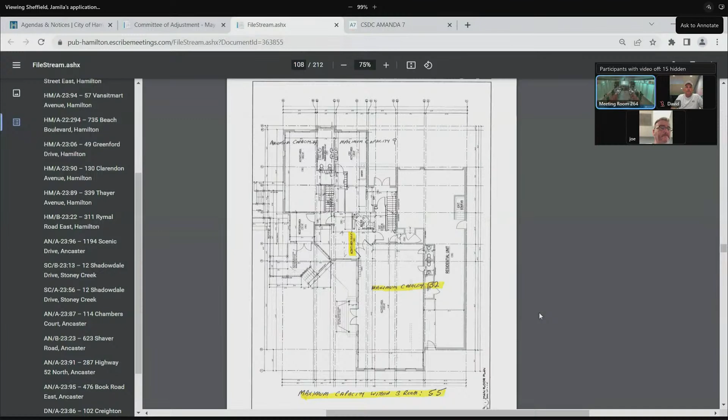So this way we're not going to be going to a 4th classroom. There's a little highlighted area you'll see, it says activity area. It could accommodate 9, but we don't need to go there. We can still leave that as an activity area, especially on days when it's raining and weather's bad.

So that addresses our first note that the city had. The second one regarding parking. On page 3, you'll see there was a ramp. To me, it was when the engineer designed it, he didn't do it right. He should have been pointing the different way, which I'll show you on the next page. And at the bottom, you'll see in the garage, we had an open space which we didn't take into account when we did the original site plan. So I figured the R12 residence, I can move that into the open space, which you'll see on the next page, page 4.

And that still stays within the guidelines that were in the zoning, how many cars you can have past the front yard and behind. So I talked to Liam, and he was okay with the garage one. And the concern with the DC-14, as you can see on the drawing where the ramp is changed, it makes it easier for cars to get in and out. There's like a 6 by 6 meter, or 6 feet by 6 feet area we got to pave, which is not going to increase the 35% maximum space that you can use for parking. So we're well within the guidelines there.

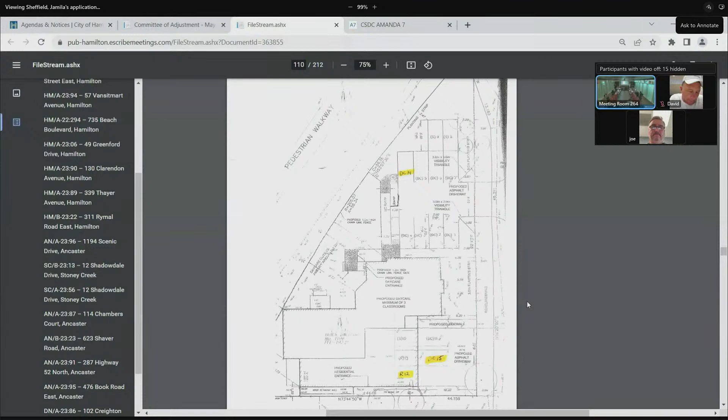And that's why I think Liam sent a letter to you after I talked to him, and I highlighted 2 sections in there. He said once we do the 2 parking spots, the total proposed parking space count is 15 parking spaces, which exceeds the minimum required amount of 6 parking spaces that we need. So I'm more than double the parking spaces to account for what we need to do with 3 classrooms.

And the third comment in the notice was regarding the barrier-free parking, and he did say, I did talk to him, that there's no requirement, so I'm not going to make any changes to that. The space will be there. I just want to keep things simple, so I'm just going to withdraw that. So yeah, that's all the comments I had to address the three issues that were brought up by the city staff. Okay, thank you.

Okay, I'll call the interested parties. So we have Palomina Filipovic first. Pamina's just here to support. We're just going to have Michelle. Sorry, so you all registered to speak, so you don't want to speak? I think they're all in support. No, it's Michelle. Okay, so then whoever wants to speak can come forward.

I'm a resident in the area. I've been there for 4 years and don't see any issues to having more kids. They do good work, they're a good center, and there's never been any increased traffic issues, never any increased parking issues. They seem to all be contained within their building and parking area, and I'm in full support of the additional children. I think it's good for the community, and with childcare being hard to find, it's not a bad thing to have more spaces available for parents.

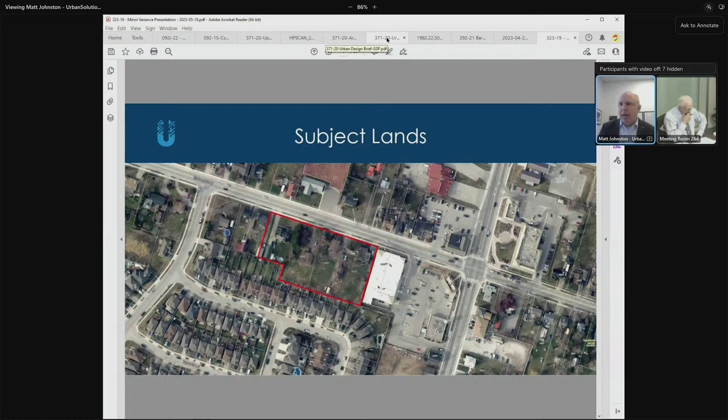This is the second time back. Some of you will recall the application was tabled so we could clarify some of the variances specific to the balconies. So here we have an aerial of the subject lands.

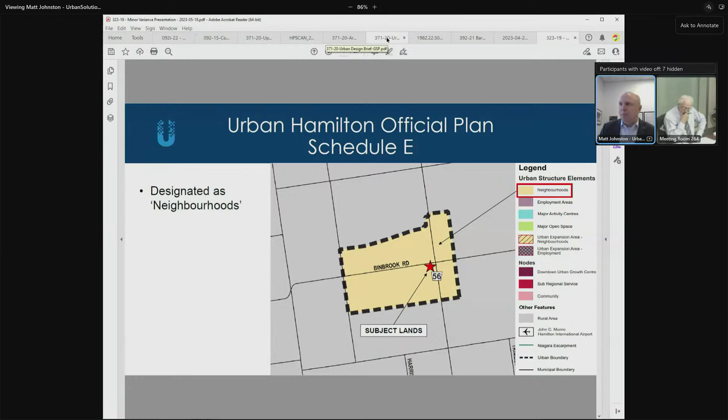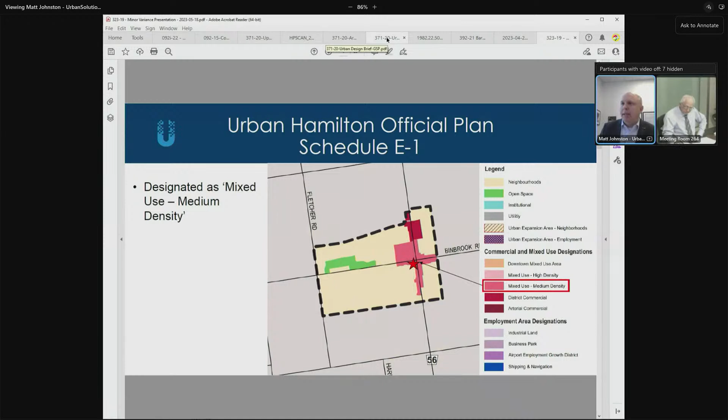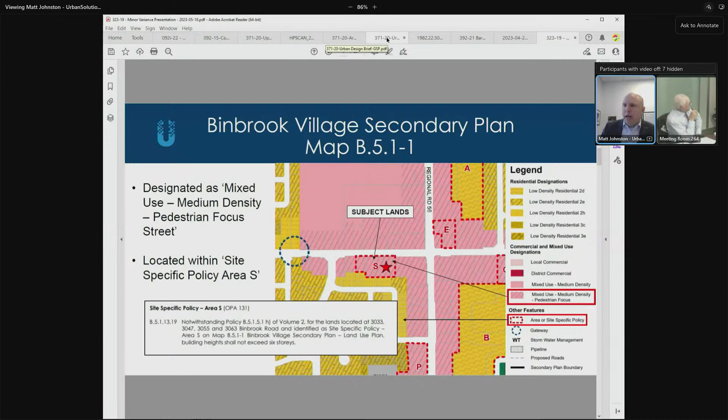From an official plan perspective, we're in the neighborhoods designation. More specifically, that was the urban structure plan. On the land use plan, we're located in the mixed use medium density designation. Here we are in the secondary plan for Binbrook, where you'll see we're in a site specific policy area S, and it's area S that speaks to the previous hearing that took place to accommodate this development.

In doing so, that development went through a LPAT, as it was called, the old OMB, the old LPAT, now the OLT, where a site-specific zone was put in place. It's now zoned C3 with the site-specific 317. And what that 317 does is permit 6 stories in building height, or a maximum of 26 meters in height, and it uses that combination specifically.

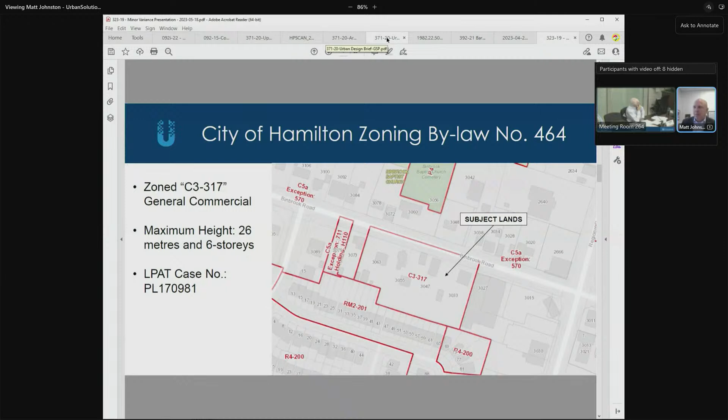I've touched on that OLT hearing, so I'll just recap quickly. That process started way back in 2016. Ultimately, it led to a 2021 OLT decision that approved the 26-meter building height, or 6 stories. Since following that, we received conditional site plan approval, and we've been moving through that site plan approval process. And really what's come to light is the need to revisit building height.

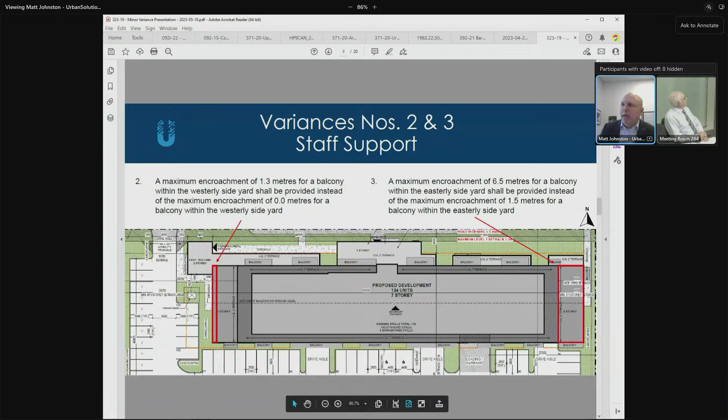Now, I'm going to close out on building height because it seems to be, I think, the more contentious issue from a staff report perspective. But when it comes to variances number 2 and 3, we do have full support for these variances from staff. And what they're really doing is accommodating the rooftop amenity that was always envisioned but not accounted for in the zoning bylaw. So we have these 2 areas highlighted in red that talk about this balcony encroachment, which is utilizing the rooftop terrace in that location. And again, we have full support from staff on both of those.

Moving on to what's more contentious in the staff report is the notion of building height. So again, the OLT decision permitted 6 stories or 26 meters. That's that dark red line you see on the screen here. That's the envelope that was approved as an as-of-right building envelope. Within that, we have to scale our 7-story product.

And the decision was really made to look at going to the 7 stories, not to increase the number of units. Actually, the number of units will remain the same. This is only to accommodate more family-friendly units, larger suites, which is something that's quite notable if you're dialed into the approval process for multiple dwellings. Family size, larger units is always one of the key drivers from a planning staff perspective. So again, we're not looking to raise the height higher than was already approved. We're just looking to accommodate a 7th story in this as-of-right building envelope.

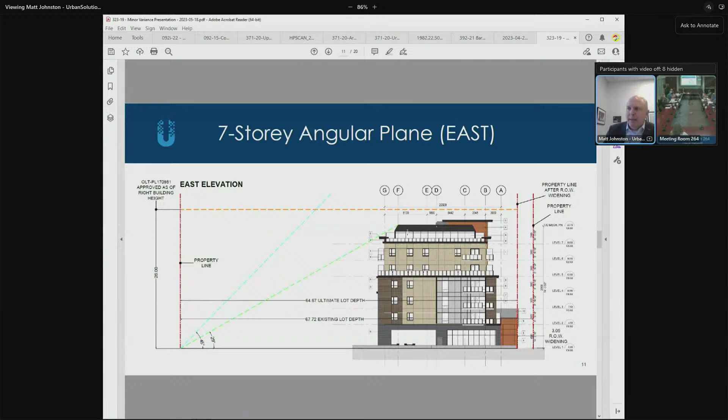And again, when we talk about building height, one of our main tests to our residents is the angular plane analysis. This angular plane shows the south property line on the left side. 45 degrees is the general rule, that's your blue line. And here we are coming in at an angular plane of 29 degrees. So yes, we're talking about adding height, but we're so far below the angular plane that it's a tool that we can use to be satisfied we have no adverse impact.

Here we have the angular plane out from the street line, and we're again below that blue line, which is our 45-degree angular plane from Binbrook Road. And again, you can see the orange line across the top, which is our maximum building height permitted in the OLT decision at 26 meters. So we're still below that when we come in at 22.7.

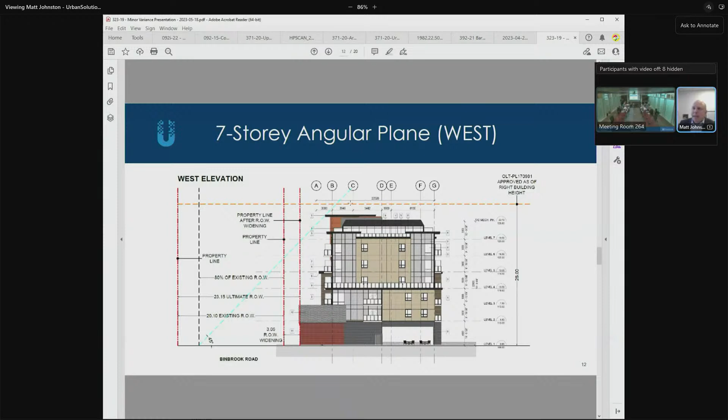We did hear from residents in the staff report, and some comments were submitted. From a density perspective, again, we're not increasing the maximum number of units. The number of units is remaining the same.

Traffic is another consideration considered through the LPAT hearing, again not changing because we're not increasing the number of units. Infrastructure capacity is another consideration through the OLT hearing, one that's really secured through the site plan process we're moving through now. Similarly, concerns over grading and stormwater management are thoroughly considered through the site plan application stage, as is noise and light pollution. We've got that process in place to have a site lighting plan approved.

And it's not all doom and gloom from the public. We actually do have support. You'll see residents speaking in favor of the application, recognizing the need for family-size units in Binbrook. It's really important to bring a built form like this to a community like Binbrook where it doesn't exist.

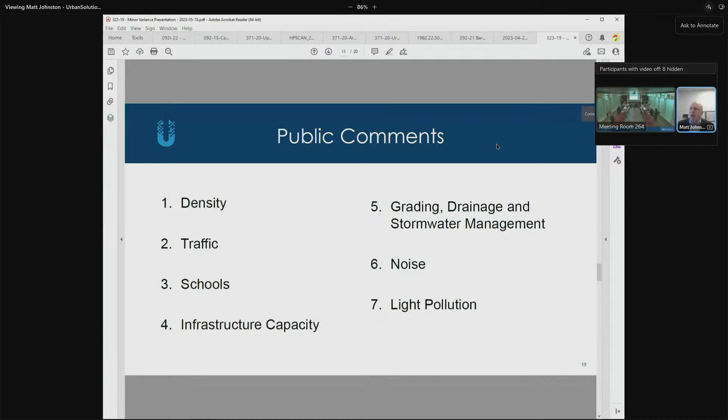And I think when we go back through the 4 tests, what we're really talking about, where we're at odds with staff, is this notion of building height, adding the story. Yes, we considered this through a previous hearing, but when we look at adding the story in a way that still respects the maximum approved height, it's certainly one that satisfies the 4 tests. With that said, I'd be happy to answer any questions.

Okay, so I believe I'm actually reading the decision here, and it says a maximum height of 26 meters and 6 stories, not or. So it has to satisfy both conditions according to the actual decision. So I think saying that it's 'or' is a little disingenuous. You have to satisfy both of those conditions according to the previous decision. Okay, just my comment. Thomas?

If I could, I did have that language correctly on the slide where I showed the as-of-right height with that red line. You're right, it is 26 meters and 6 stories. We're asking for 7, and again, we're well under that 26 meter cap. In that sense, the intent of that cap is maintained. That would be our position there.

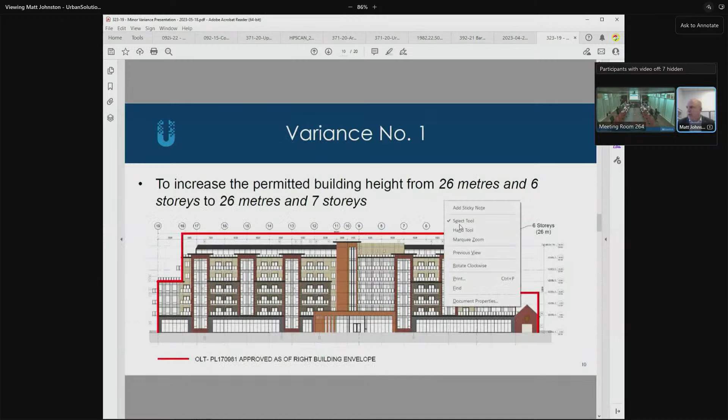No, but are there 7 stories? Can you just flash your diagram again? Is the first story commercial and then 6 stories of residential? I thought I only counted 6 stories. Maybe I've miscounted, sorry, let me just go back on the screen. So what I'll do is zoom in. So we have 1, 2, 3, 4, 5, 6, 7. Oh, that top part is 7. That's right, it just looks different than the rest of the building, that's a penthouse.

Well, that's why I'm asking what's on the 7th story, and I asked how many units as well. I don't think I got an answer. So the number of units again is not increasing. No, how many on the 7th story? Sorry, through the chair, I don't have the floor plan as part of my PowerPoint, so I can pull that while we're chatting. It looks like it might be a small number of penthouses, is that sort of an accurate assessment?

While Matt's looking that up, Nancy, did you have a question?

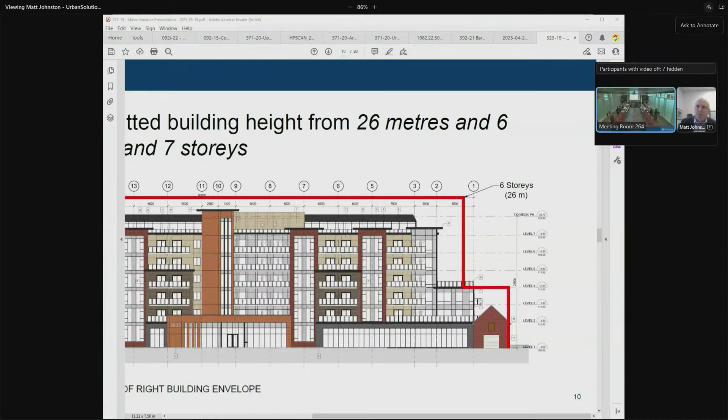I did, and I do. So with all due respect to all the residents of the community of Binbrook as it sits, most of the objections we're hearing refer to Binbrook as still being a village, a town, a rural part of Hamilton, and I find that a little difficult because there has been such an influx of building in Binbrook over the last 15 years anyway. They've added schools, they've added shopping and roads, and yes, they may not have McDonald's or a gas station yet, but those things have been proposed, and I'm sure in light of all these additional residences, those things will become part of the community of Binbrook.

Matt, since you are staying under the red line, did you decrease the ceiling heights in those units to make that work, instead of 9 or 8 feet or so? Yeah, there's a combination of 2-story units, so that allows for some play in the ceiling heights. Okay, thank you, that makes sense.

And then in terms of traffic, anything close to a major intersection, where this is only a few meters down the road to an intersection, you're going to have that backup anyway. I always question traffic unless there's a feasibility or traffic study showing all people will be moving in and out at the same time of day. That's not going to happen with residents so much as with a commercial building like an office or industrial space. So unless someone can give me other reasons why not, I don't have any issues with this.